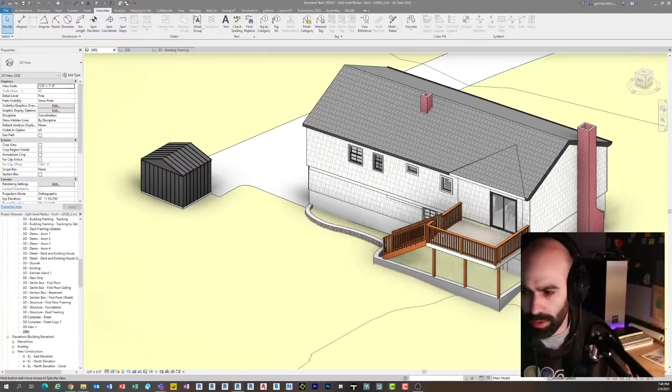If I go to the side, you'll see the grade drops from front to back a little bit down here. So what we're doing is we removed the existing deck, and we're building this. Nothing crazy, right? It's 2 stories. This is actually going to be a dining room.

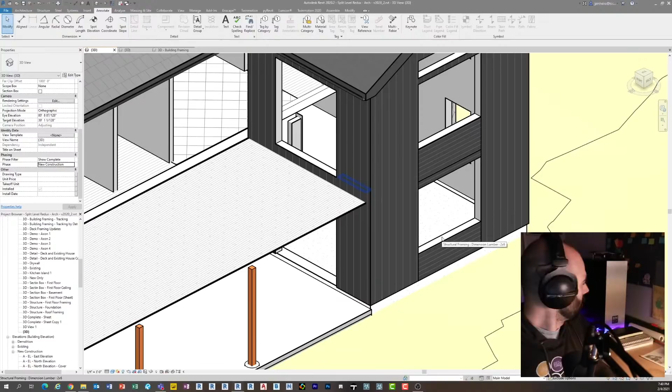Down here is going to be a new office. A couple people mentioned that maybe it looks a little different back there. I'm in the process of getting rid of some of the furniture in here, just because we have a dumpster in the yard.

But then also building this huge deck here, which is going to be great because anyone who's ever lived in a raised ranch knows that the connection between the public space on the upper floor and the yard can be kind of awkward. So being able to walk out through different areas and connect those pieces is going to be really nice, not to mention giving us a nice little covered patio in the backyard here.

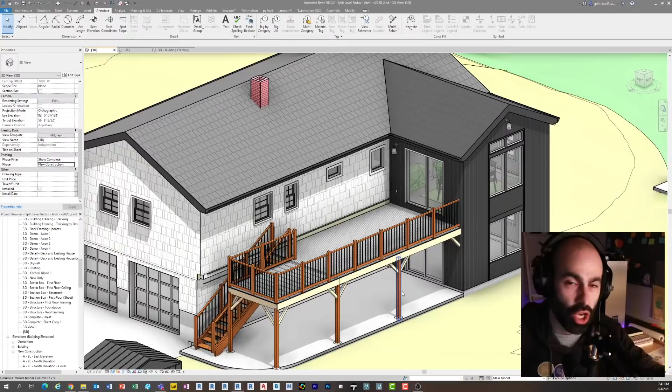And so I want to give you a little update on where we are as far as construction is concerned. Also show maybe some... I know for me personally, and I'm assuming for most of you out there who are architects, engineers, or contractors, just seeing construction progress photos and videos is always extremely exciting.

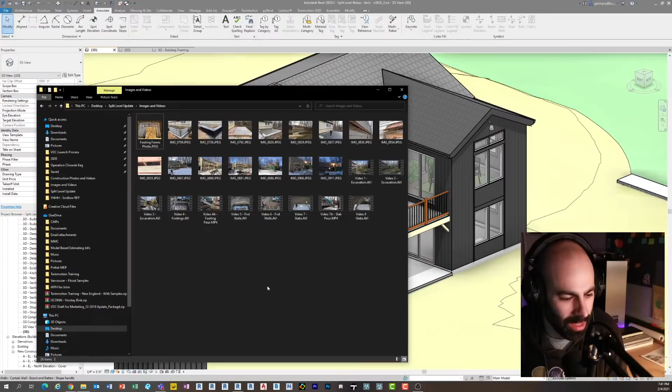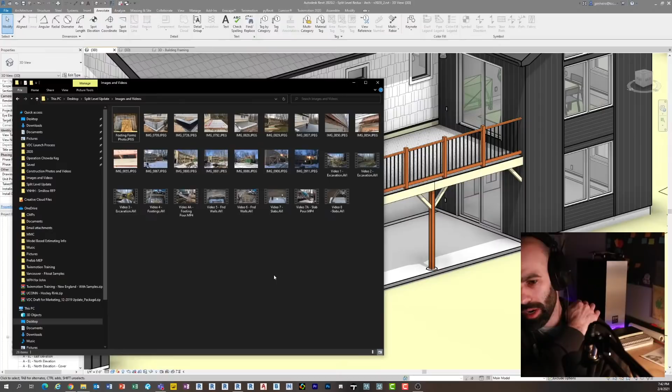Joe Buchek just said, love the cross bracing. Yeah, I was going back and forth about the bracing, because it's not very tall, and you don't necessarily need it since the posts are short, and I also was worried about headroom. But I do like the look, and now that this thing is framed and built out, I think cross bracing is necessary because there's just a lot going on. It's a huge deck. And actually, I do believe there is a sort of code requirement for the cross bracing, depending on how you read it, but I haven't been told to put it there. I'm just going to put it there anyways.

All right, so let's just run through real quickly because I do have some cool content for you. In general, I've been trying to record and document this build for the sake of content like this, but also maybe putting together more structured productions of it, to post on YouTube and share with the world. Unfortunately, due to weather, it's been kind of hard to get some of the footage.

Something interesting on a construction and detailing note: this is a slab on grade, but in Connecticut we have a 3'6" frost depth to the bottom of footing. And because of the way the grade dropped off, we essentially had almost a 5-foot wall, and instead of stepping it, we just kind of made it flat. It's pretty funny when you look at the hole afterwards. Let's see.

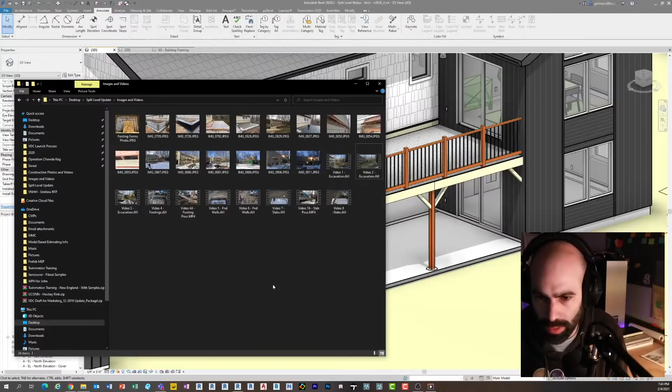I just saw a couple things in there. Yes, structural code, yep, I know structural code. Yes, I know the bracing. And I only went with 4x4 columns, so I get it.

Clay just asked, do you see BIM ever really being widely used in a residential setting? I hope so. There's definitely a challenge to getting it used across the board in residential. There are more and more architects doing it, which is great. Getting residential contractors to do it, that's going to be a bigger lift. But there are benefits to it, and depending on the relationship, you could be borrowing the model from the architect and using that through construction, and at least just extracting information from it. So I think it's plausible. With the right contractor and the right architect relationship, I don't see why not.

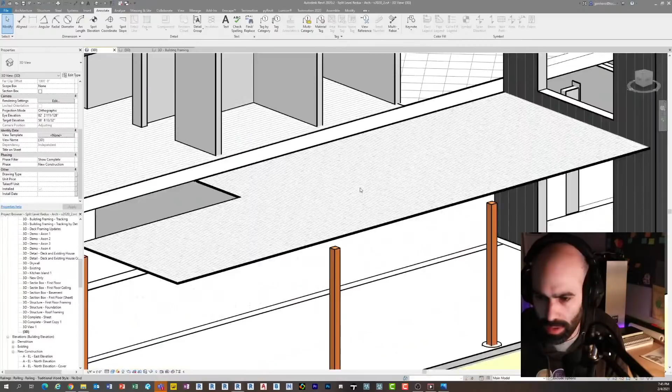Gary just asked, is the railing Trex or your own family? I guess you're talking about in Revit here. So this is my own family, which is basically one of those aluminum railings. I don't remember when I made this family. I made it a long time ago for a house, and I've been using it ever since. I really do like that family. So no, this is my own family here.

All right, so there's the footings. So we went... we use Revit primarily for residential with my business.

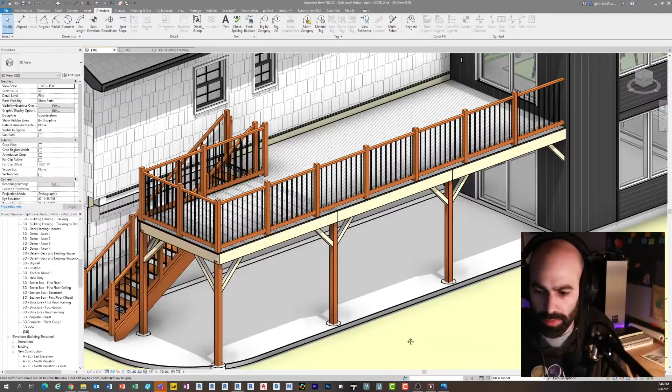Just to run through a little bit more progress, that went pretty good. Excavation went pretty good. I would say the only part that didn't go good with excavation is, and I mentioned this last week, was finding my septic pipe finally, and it happened to be right in the middle of one of these piers. We're going to talk about on a silly little job like this, the snowball effect that caused on this project and the changes that were made because of it, it's pretty impressive when you think about it. It's one of those things where the only way we would have known is by digging and finding it ahead of time. But either way, we had to put a post there.

So let's just quickly go, I'll show you a quick video of the footings being poured because that's fun to see. Enrique was my concrete guy, he was awesome, he's great. There he goes, pouring the footings. The footings, the excavation, footings, walls and all the concrete was basically done in under 2 weeks. And that was with the excavator only working on weekends and Enrique coming in between doing what he was doing. So pretty awesome, happened pretty quick.

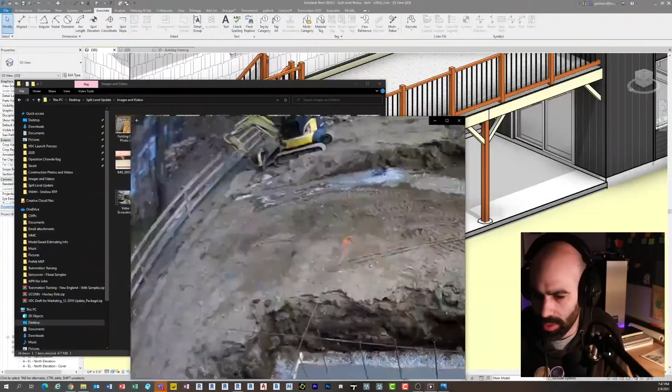Almost too fast because the framer came and the slab wasn't quite ready yet. But that's also because it was 10 degrees outside. So there's a video of the footing being poured, just another video of it there too. Let me mute that because we all love seeing construction videos, right?

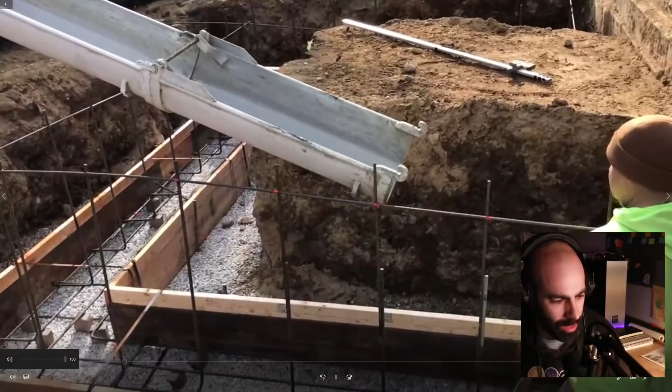So there's the footing going down. You can see how deep that hole was. It's pretty wild when you think about it. At the end of the day... oh, my desktop audio is going, sorry guys. At the end of the day, it's a slab on grade, but this is what we had to do for excavation for it, which is absolutely nuts when you think about it. So there we go, pouring some concrete, pretty fun.

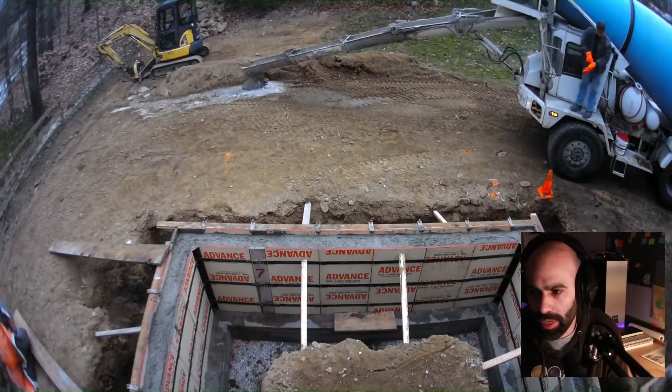And then obviously walls, running through some nice time-lapse walls because that's always fun to see. There's the footing walls came in, rolled in. Pretty awesome that we were able to roll the concrete truck right up to it. Luckily, there was just enough room between the septic tank and the house that he could roll through it. He did do a little bit of work to my asphalt, but otherwise all good there.

I see you guys are talking about residential construction, which is great.

So now the slabs are going in. You can see we got a nice little thermal break going on the edge of the slab, and then building up the vapor barrier and rebar and all the good stuff in between the slab.

While that's going on, I'll quickly read some comments. Jordan says he's full on modeling a house for a new build in St. Paul - nice, great to hear it. Joe Butek just said he uses Revit for residential, and the 3D is amazing. We are purely residential too. Philip said he's heading that way as a residential builder as well. That's what I like to hear. I'm not as surprised anymore to hear architects using it on the residential side, but builders is where I'm interested to see it grow.

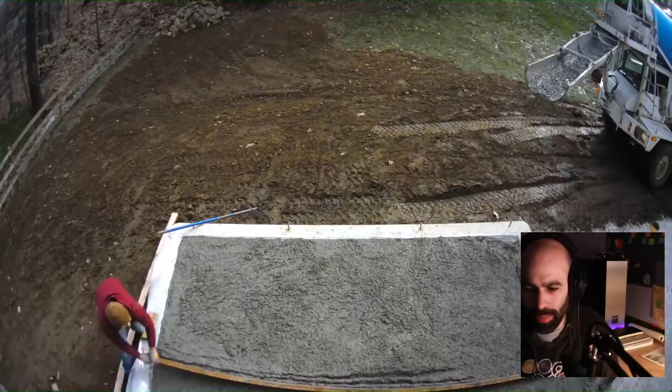So real quick, let's see the slab pour so you guys can see the unfolding of it all. There's the slab pour, there's my buddy Enrique doing an awesome job troweling and all that good stuff. Nice and smooth, awesome. And there's the slab. Unfortunately - fortunately we had great weather for these two weeks, but the day he poured the slab it dropped to like 20 degrees that night, and it's basically been crap weather since. Not too hot, not too great, but it is what it is.

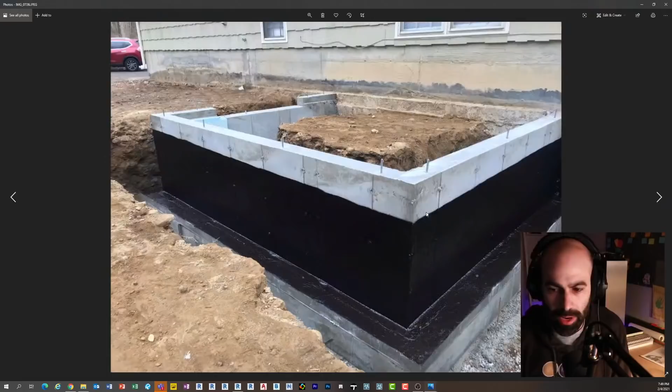Just a few more photos. Here's the foundation wall, here's the foundation wall with some waterproofing. There's the slab rebar, there's the slab after it was poured, nice and wet. That's what the view looked like.

Joseph says yes, that is a beautiful footing. For such a small little addition, concrete went so great, and Enrique was the man. Joe, I know you're in the area, so if you're ever looking for a concrete guy, reach out to me and I'll give you his contact information. Insane, awesome job - no radiant heat on that, by the way.

And then stuff like this happened. So this is where I'm going to pull back to the Revit model, and then we're going to jump back and forth between it. A couple things before I jump into where we're at now - as I mentioned, that part went really smooth, went through pretty quickly. The contractors were great, the process was great, and the weather was great. So not too many changes.

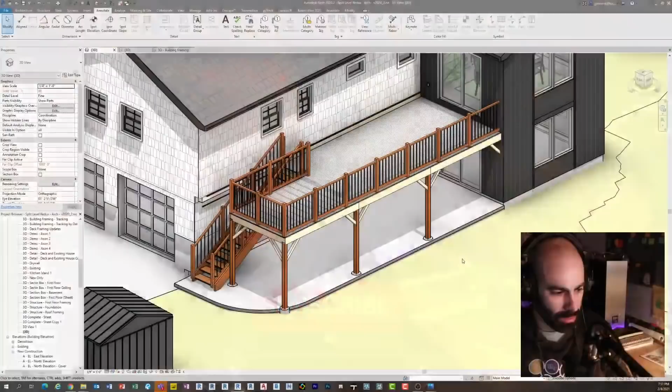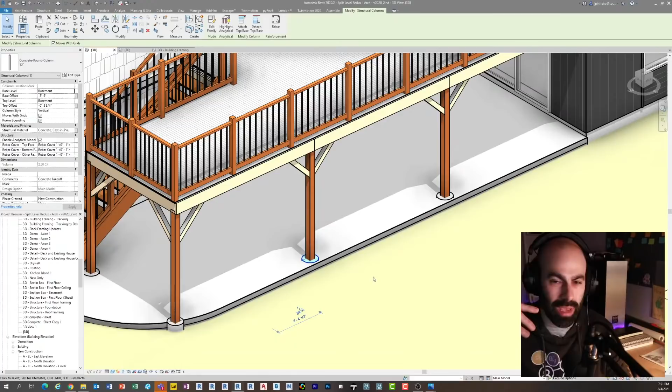The big change was the footing - oops, I hit subscribe. The footing right here had to move, and it had to go this way by like a foot or so less, which means the whole deck was going to move, subtract by like 2 feet, let's say, and that pulls the entire deck back 2 feet or so. I didn't want to make the deck smaller, I liked the size the way it was, so we ended up making it bigger.

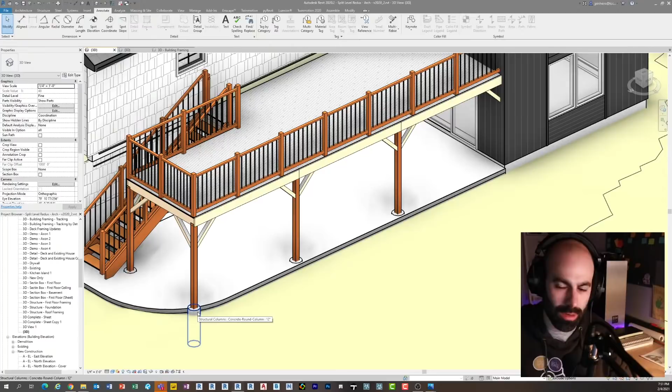As you can see here, this is actually the new layout of the footings. Because the deck had to expand, the footings had to expand, and in order to make the spacing equal in between, the space between the beams got longer. So we got to that point, and I updated the drawings, which was fine, and we used it for the framing.

So then the framers come out, and day one of framing - this is basically what they got done, which wasn't bad. As you can see, this was after it snowed, so day one of framing it basically snowed. You can see if I zoom in here, they got the first floor done. Sorry for the dark pictures, but I went out at night.

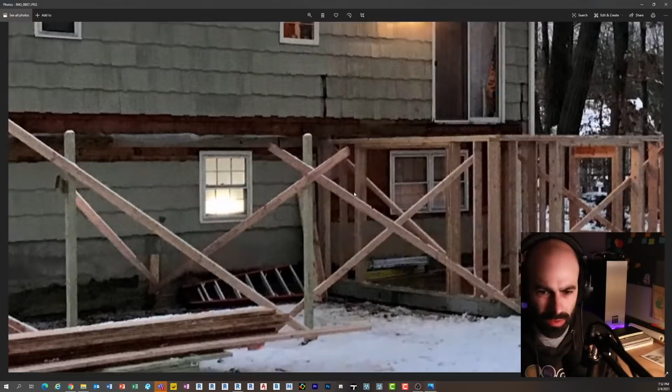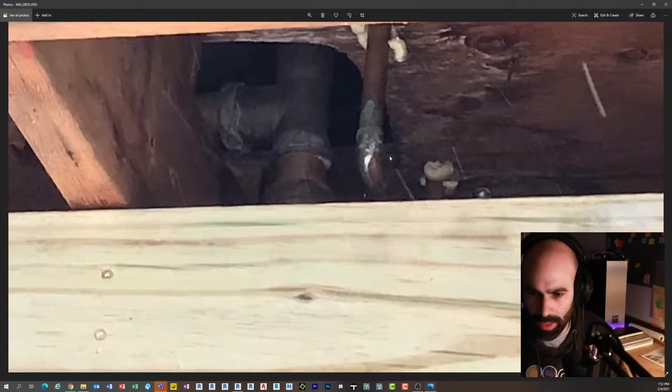But this is where the damage happened - notice how all of this is ripped up over here. That was not supposed to happen. Things happen, right? It's the way it is. But this is what really bothered me - if you zoom in, I walked up and it was snowing outside, and sure enough that's the drain pipe to, I think, my bathtub, and that's the supply line to a sink.

Remember, this was 17 degrees that day, and needless to say, you can see here all the insulation's gone, and you could just basically see through my joists, right? So needless to say, wasn't happy.

It happens, depending on unclear instructions or whatever. I could tell you the demo drawings didn't have anything about removing this, but this sort of leads to one of the first ways I used Revit to solve a quick problem in the field, the ability of 3D views in Revit and being able to explain and show things.

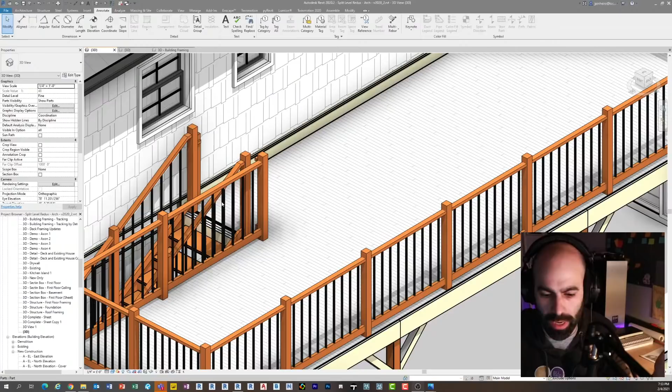I've already mentioned this many times in different lectures or sessions here, how I believe we should use 3D as much as possible, add 3D axons and all kinds of stuff in our drawings. And these drawings have 3D axons and whatnot.

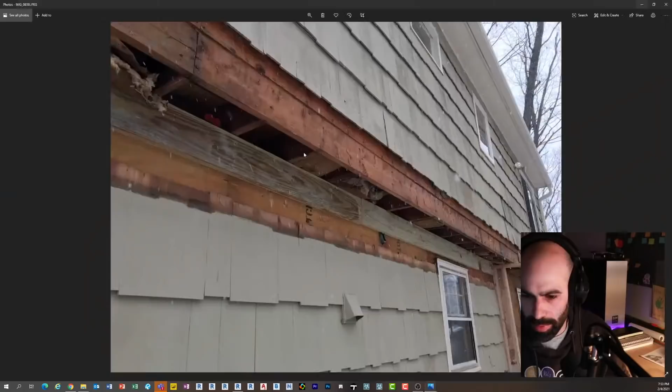But what we had to do now was I had that detail that just happened, which we weren't expecting, so we quickly needed to show the framers how to fix that. I sketched it by hand a little bit to figure it out in my mind, but then I wanted to update and keep it in the model. I wanted to build this stuff in the model and then use it.

So the drawings are out there, the plans that were used for permit. But I found myself creating a bunch of printout 3D images that really, the guys ended up building off of a lot of these details, especially the ones that are on the fly.

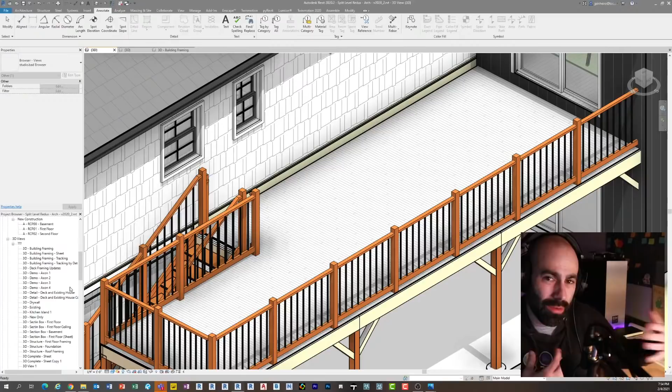Obviously I'm sitting right here next to the project, but to be able to, within 15-20 minutes, produce some of these images and drawings is extremely valuable, right?

You can see I printed, and actually there's another detail there. So I quickly modeled this, printed it out on a piece of paper - I think I had a section view of it too - and then we just walked through it. Real quickly I was able to mock up this detail, show the framers on the fly, and they were able to fix it, modify it.

And now we've got ourselves at least a watertight sort of detail. So here's the detail actually built now. Let me see what the picture is. Can you see in this photo? I guess I don't have a photo on it, but if I zoom in a little bit you'll see it.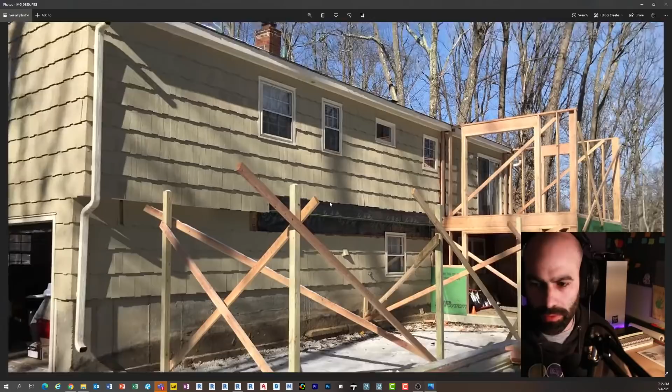Because with a residential project, you don't need to reissue an addenda and an RFI and a bulletin and all that - it's just not how these things work, they don't work that fast. So being able to really quickly flip out an image is more like an ASI, an architect's supplemental instruction. But in this environment, it's more just: how are we going to fix it? Let's fix it, throw it out there, and go for it.

I just see a bunch of chat, so let me quickly answer - classic siding and classic New England, yes that is the shingle siding, classic New England. The split level with the 2-foot overhang thing - by the way, I never imagined myself living in a raised ranch, and I'm not a huge fan of that overhang detail at all, honestly. But it is what it is, and we're dealing with it. It is very classic New England - there's 30 houses on my street alone that have that setup.

Ronald just said, I always strip down my versions of models to remove any extraneous information. He's replying to Eric, who asked, any tips for digital ownership of Revit models and sharing?

It's more of a commercial question, but with residential, I do believe there's the opportunity for this. If you find a contractor who is familiar with Revit, maybe there is one, maybe it's myself, maybe I decide I want to do just GCing and architecture of residential.

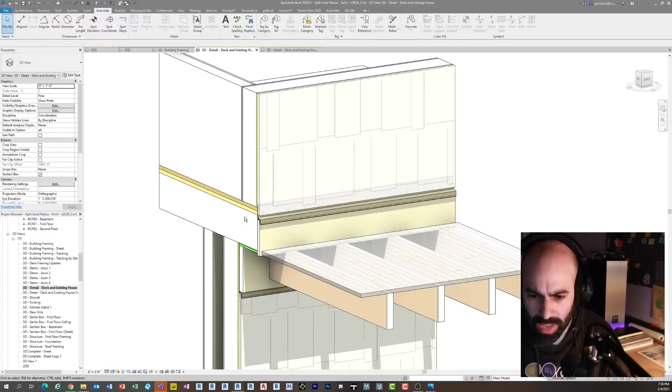Pretty cool, right? So that was just a quick example. But even before this, I should rewind a little - there are a few things I used Revit for that helped me a lot, because remember, I'm GCing this. I say GC just because there's only aspects of it that are, and there's a lot of overlap with architecture and residential when it comes to that. But material ordering, tracking progress, all of these things, beyond just making changes on the fly, are also huge.

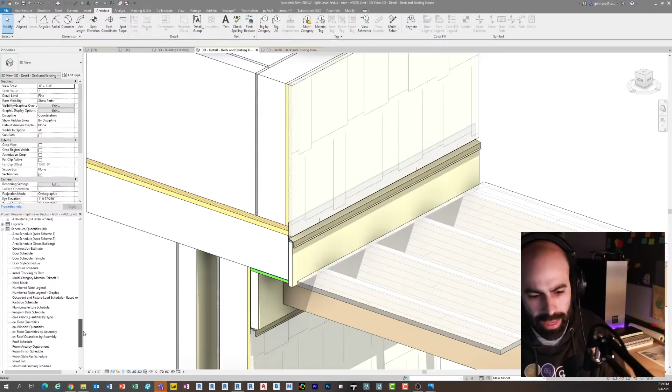I had to order all the material myself, so schedules - if you'll notice here, I've got a whole bunch of schedules. If I go under multi-category material, here is a multi-category material, I'll zoom in so you guys can read it. This is literally every material in the project. I have the material name, the family and type, and then the area, volume, whatever it is.

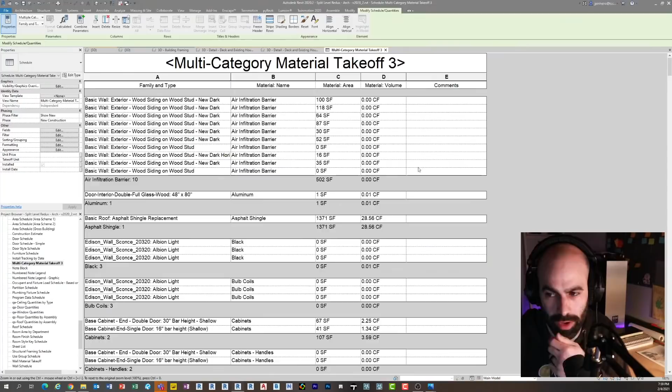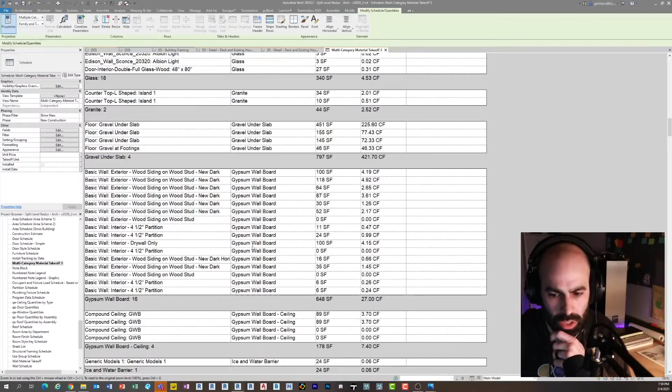So as I go through this, I can filter by the family type and look at all the materials within it. So you could see here, this is all the gypsum wall board, but these are all the wall types they belong to, and there's square footages. So for me to quickly rip out square footages and areas and linear feet of boards and beams, huge - being able to just quickly use that information to order materials.

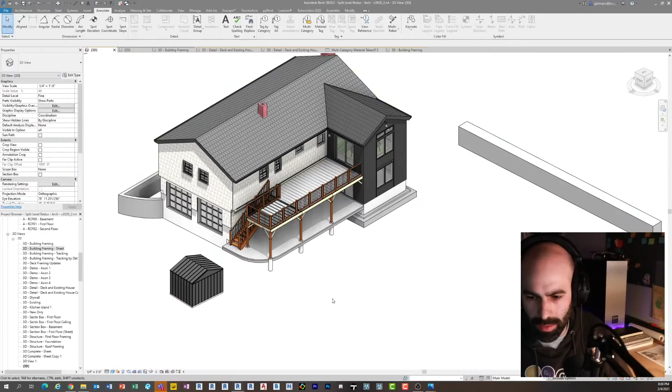But then silly things, like if I go to another 3D view here - ordering gravel, right? There's obviously formulas and all that good stuff. Let me go back to this view where you can figure out the volume of gravel and whatnot. I'm sitting here like, well, I have a model, I could do all the math, but why not just model the gravel? So if you zoom in closely here...

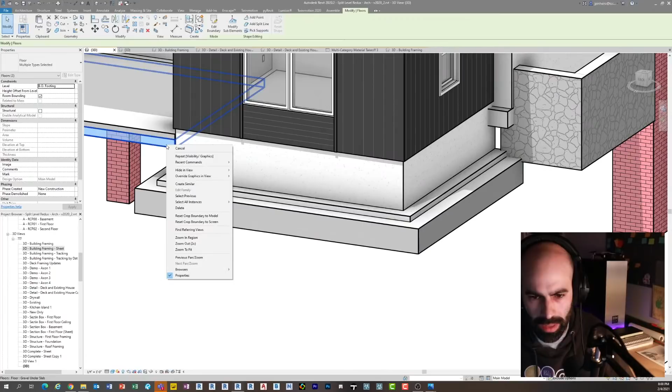This right here, this is 6 inches of gravel under the slab. This is gravel representing my drainage around my footings. So if I highlight all of these, you can see there's gravel here, and gravel underneath there. Let me just isolate it. So I modeled my gravel, and then I used that for the quantity, the volume I should say, and then I ordered the gravel.

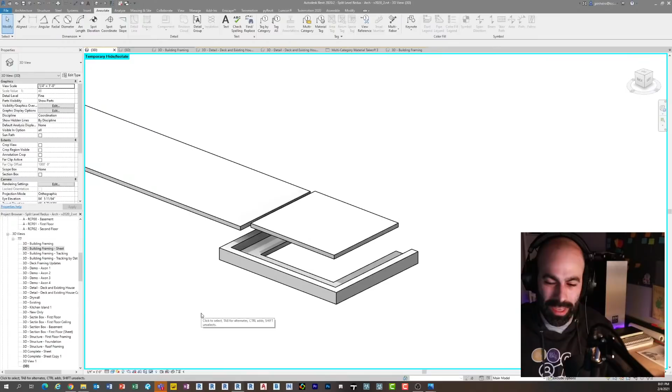Let me tell you, there is a pile only about 6 inches tall left, so that's pretty cool. The excavator was extremely impressed with how close it was, and the fact is I didn't have to guess or just take areas and do the volume stuff. I just used the real information, and as long as he wasn't too wasteful with it, I almost had the exact amount of gravel, which is something you're usually pretty conservative with, and you end up with a ton of it.

Ordering wood is one of those things where... the lumber yard. So let me go to my framing real quick - deck framing.

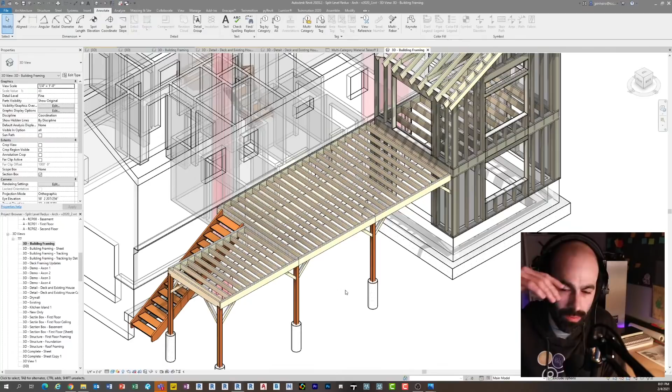So as you saw from previous episodes, I modeled most of my framing in this. Actually, I modeled all my framing, I should say. And I use that information for quantity takeoff, for pieces, for figuring out linear feet and all that good stuff, even number of hangers and all that.

The one thing I discovered is I did all of this, and then I sent it to the lumberyard, and they do a takeoff and give you a quote based on the drawings. Across the board, I was getting 18 to 20% more on their quote than what I was getting. I know there's a factor for cut, but it was so consistent that it was surprising me. Turns out that's literally what was being built in, the 18 to 20% for cut and waste.

So the one thing is, if I had a little more control over the framers on a job like this, or maybe I was the framer myself, I would take this information and produce some sort of a diagram. I have a view like this in the sheet and all that stuff, but to be able to show the framers this piece is meant for this, unfortunately you just can't do that. So the 20% just has to be there, because these guys just rip and roll, man. They just rip it, right?

But the reality is, if I was to use my model as the guide, as the quote, and then maybe out in the field you mark them and say A, B, C, D or something like that, you could tell them, hey, there's actually 12, 2 by 10 by 10s. Don't use the 2 by 10 by 12s for this little short piece. That's where the inefficiencies come into play, right? But pretty cool that I was seeing at least an 18% to 20% almost across the board, which is pretty wild, right?

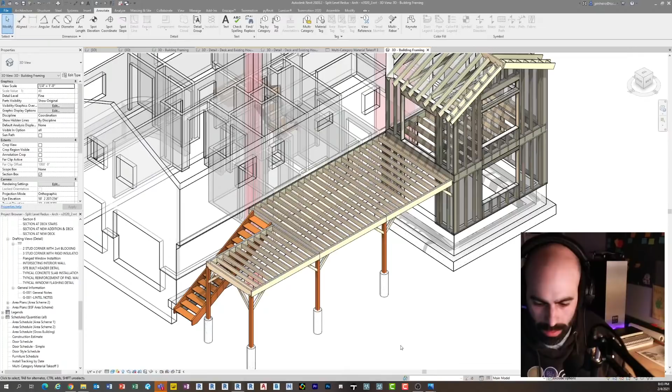Okay, so then before I jump into the deck itself and some more of the changes, I will run through a few more things that I'm doing with schedule and the model itself.

So if I go in here and I go to tracking, here's another really cool thing I'm doing. Sorry, I'm just reading you guys' chats. Remember, feel free to ask questions and stuff.

Pressure treated lumber tends to twist a little bit. Yeah, Joe, it does. And that's why there's blocking and all kinds of crap all over this now, because I'm also worried a little bit about twisting too.

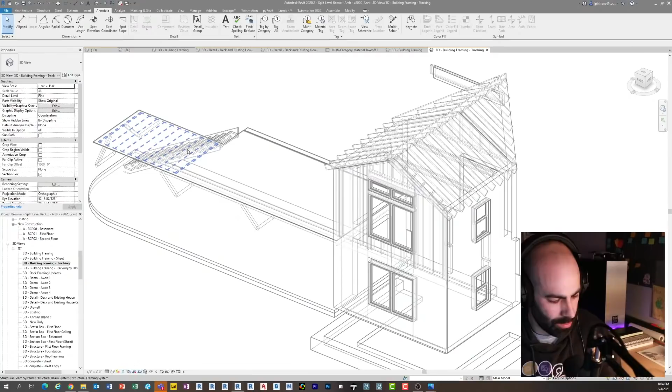So check this out. What you're seeing here is a 3D view of the framing and some other details like windows and stairs and stuff like that. Everything in pink has been installed. So if I turn off this filter here, you'll see what's not installed. Let me try that again. There we go. So this shows what's been installed in the field.

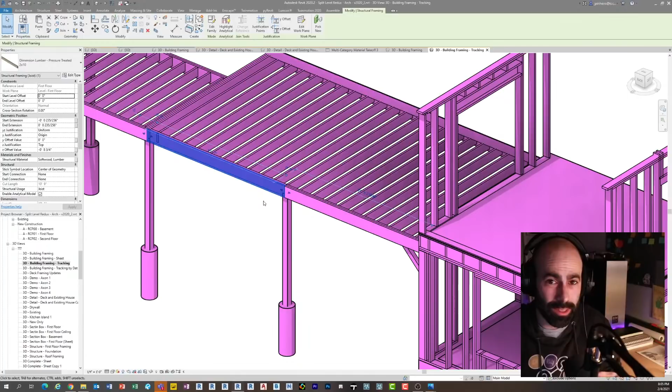I'm taking a process that we developed at Turner, my group developed, using Assemble, which if you guys check out 2 episodes ago, head on over to live.bimafterdark.com to check it out. I talk about Assemble a little bit, and we're using that to track progress in the field, because it makes it really easy to input data and then also to condition and modify it.

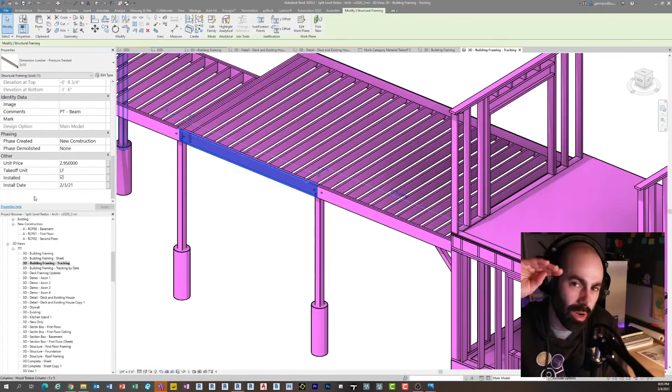But if you'll notice, I have some extra parameters, and hopefully you guys can read this. I can't, can I scroll in there? Look at that, nice. Let me roll down here. So I have a few global parameters in here: unit price, takeoff unit, installed, and install date. Those are multi-category parameters that I hit every category it let me hit. And I'm using those to track different things.

Unit price I haven't kept up to date since my estimate. I use that for budgetary reasons, and I didn't actually roll back to input the new data. I will tell you that a 2 by 10 is no longer $2.95 a foot, it's like $3.20 a foot or something like that right now in my area. So pressure treat is very expensive.

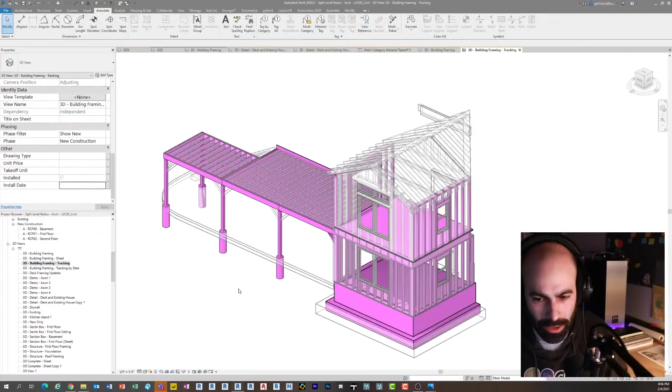So what I'm doing is I'm actually tracking if something's installed and tracking the install date, which is pretty sweet. I have progress here, and I can look back on the actual progress. I also really wanted to see if I can get this process that we developed at Turner to work using just Revit, because as a single architect or a GC, you may not want to spend the money on something like Assemble or another program. You're already spending the money in Revit, so you can do it, which is pretty awesome.

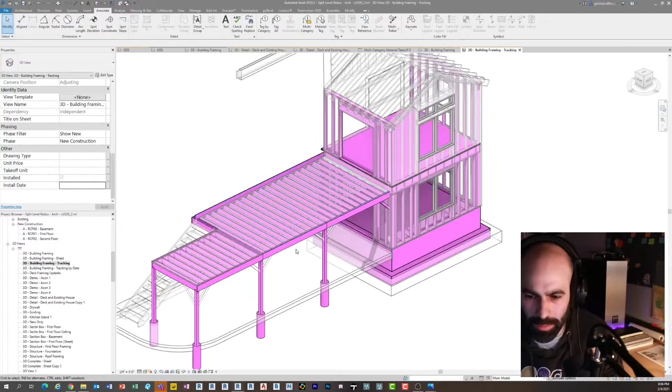The downfall is, if you'll notice, these things were all installed on different dates. If I click this, this foundation wall was installed on January 14th. This beam here was installed on February 3rd. So I just have them colored purple. If I want to see what days everything was installed on, I can, which is pretty cool. That's this little Easter egg looking thing.

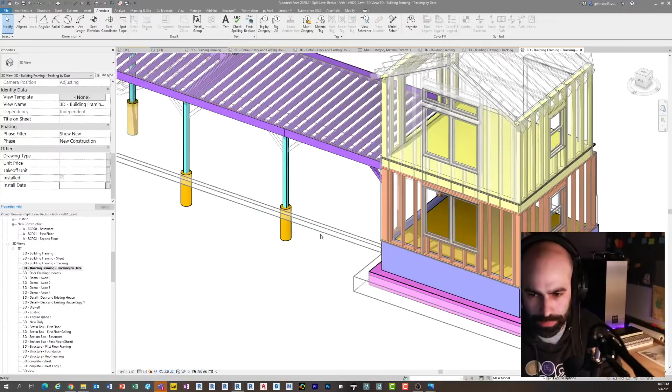I'm going to turn off the not-installed-yet filter. What you'll notice is that, and this is just a limitation of Revit's filtering, I basically need a filter for every day. It's not that bad because I'm adding the filters as I add the information in, but as you can imagine, it's a pain in the butt. Whereas if you saw when I was using Assemble, it automatically just grabs the parameter called install date and puts a color to every single day, which is pretty cool.

But being able to look at it like this, and seeing sort of the progress in the process, is cool, and it could be extremely valuable to people. Right now I'm just kind of using it as a test, but it would be good to look back afterwards and see when things were installed, how the progress was on a more complicated project, maybe the sequence that the contractors took, and so on. So pretty cool, and it's very simple.

It's literally, I can show you how I do it. Ready? You go to Manage, Project Parameters, add a new project parameter. You say check all right here, so you check everything that exists, and then I'm going to call this one install status live. I'm just making a new one called live. I make these all instance parameters. This one I'm going to make a yes-no parameter. I'm going to group it under other, which is fine, and then click OK, and then click OK.

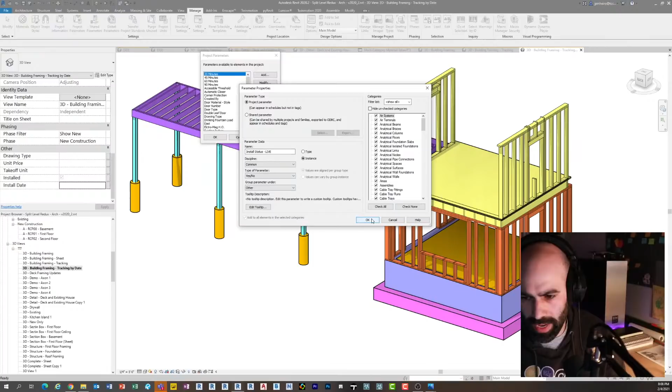Now when I click an element, you see this right here, install status live. There it is. All I have to do is check the box, and that tells Revit it's installed or not. With the date, it's literally the same thing, with the unit pricing too. That's how easy it is to add parameters, and then you can use that information to drill in. You can make schedules out of it, you can make views and filter them like I'm showing you right here. So the power is there, and all you're doing is adding the ability to add more information to your specific model elements, which is pretty sweet.

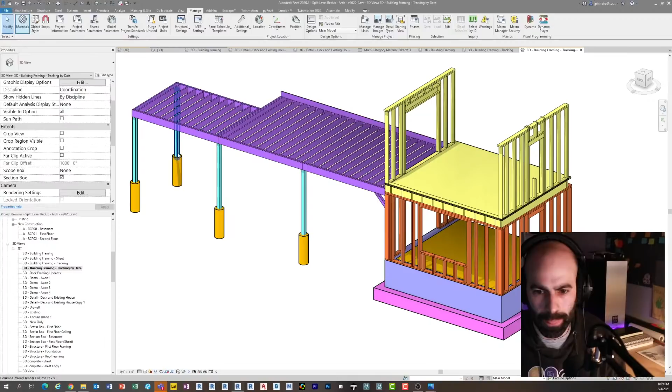I'm going to undo that because I just realized I'm actually in my real model. I should have probably saved this as a live model, but that's okay.

Yes, I have. That is what we use at Turner for all of our document management. Doing my own 2 or 3 month projects as a GC and architect, I'm not going to invest in Procore, plus I just don't have that type of documentation happening on this job. But Procore is fantastic for what it's built for.

And Matthew Barnett just said, I'm late to join the stream, what have you used to model the framing? Matt, this is all built 100% in Revit. I'm using beam systems and different variations. If you check out live.bimafterdark.com, I have a few episodes where I actually run through this specific project and some of the ways that I built the framing. Or head on over to the YouTube channel itself, and I may have a separate individual tutorial for it.

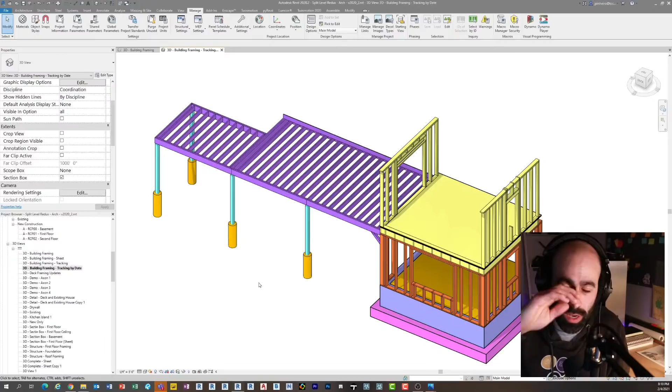But all built 100% in Revit.

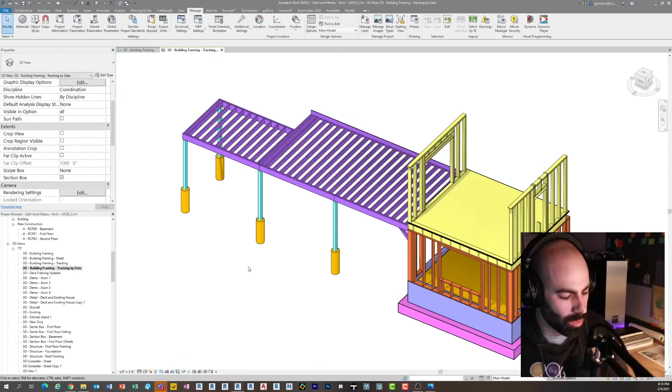But Revit actually gives you the ability in filters. For those who haven't used filters, I do plan on digging in even more. I have an episode with Aaron Maller from last year about filters. With filters, you can see I had one for not installed and installed. But you could, in theory, create a new filter called 'not installed live' and just hit a couple of the categories because I don't feel like hitting them all.

Now you could go to install date and say 'has no value.' I don't remember when that was added to Revit—maybe 19, maybe 20, maybe 18. No, it wasn't 18, but maybe 19. This is 20, I believe, I'm in right now.

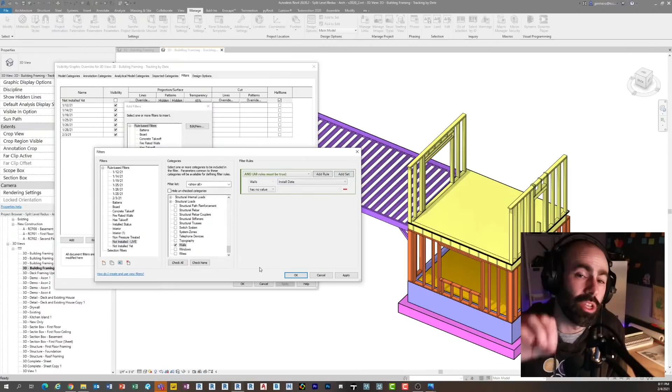So yes, good point, Emil. If you don't want to have the checkbox, you could easily just have a filter that says the install date has no value, and then you could turn it off, halftone it, do all kinds of cool stuff. These are the options you have in filtering: equals, does not equal, greater than, less than, contains, begins with, ends with, and then has no value or has a value now, which is pretty awesome.

Maybe someone out there remembers when those were added, but I don't think those were there forever. I know those weren't there forever.

Cheers, Matthew. Appreciate it. All right, man.

Awesome, so cool. So there's something I'm doing there which is pretty neat—being able to sort of track the progress is awesome, being able to check it against it. At the end of the day, I'll have these install dates and be able to look on a calendar and see how the progress went, which is pretty sweet.

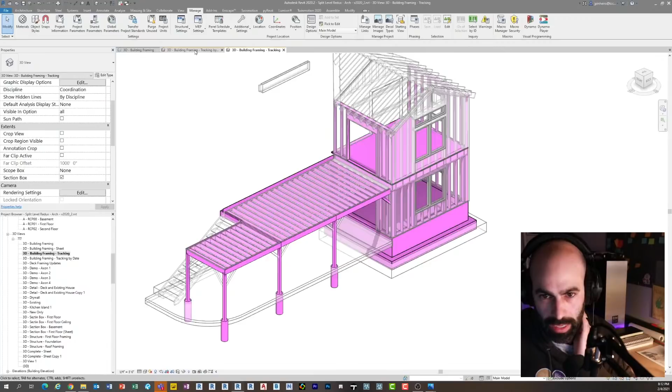So then let's roll back to the deck. A few things were happening on the deck, and again, just another great example of where having the ability to quickly modify, create, and spit out imagery and documents—instructions essentially to the contractors—is so valuable.

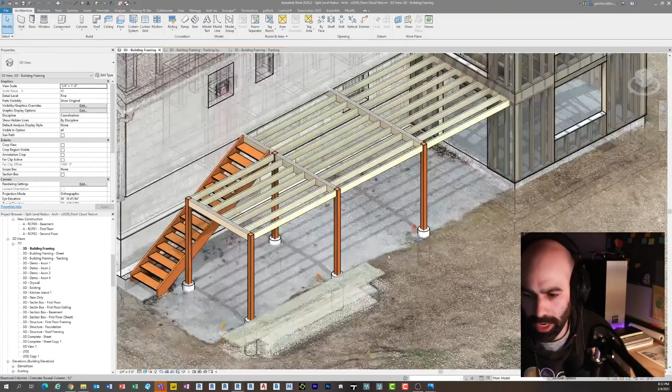Actually, the reason I opened this one is this is from the drone scanning episode last week—this is the old deck design. As I mentioned last week, if you look closely there's these little cones showing the length, the change of those piers. You'll notice the end pier actually moved almost 2 feet over, this one moved about 1 foot, and this moved about 6 inches, to evenly space them, because of that distance and a couple other things that happened.

So the distance of these joists got longer. I wanted to go in the direction you're seeing here, which is 2x8s, keeping it really flat because I didn't know what kind of headroom I needed, and sort of creating these smaller spans with the beams running across this way. Because we expanded the decking, the length of those joists got longer.

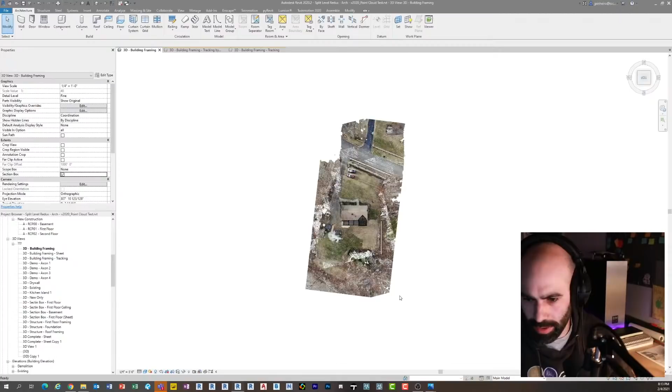The other thing that happened is until we established the slab—let me turn on a section box. I know a lot of you guys don't come here to talk about geeky Revit detail stuff or architecture detail stuff, but I'm hoping you're interested because I love this kind of crap.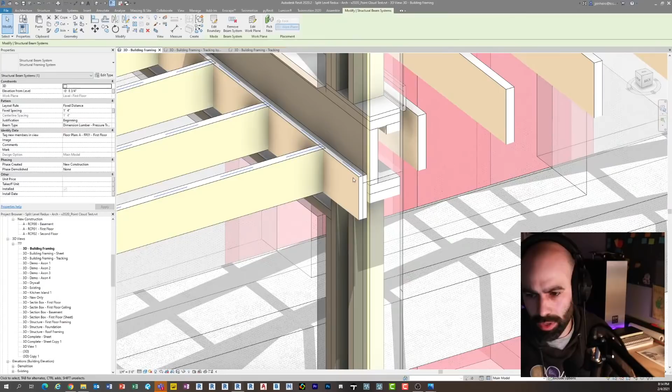So if I cut a section through here really quickly—just cutting a section through it—you can see the value, by the way, in modeling framing. Even if there's going to be a structural engineer down the road on a project, just for your sake of figuring things out as an architect, modeling it is incredible. As you can see here, the way I modeled this was already kind of tight to the window head, right?

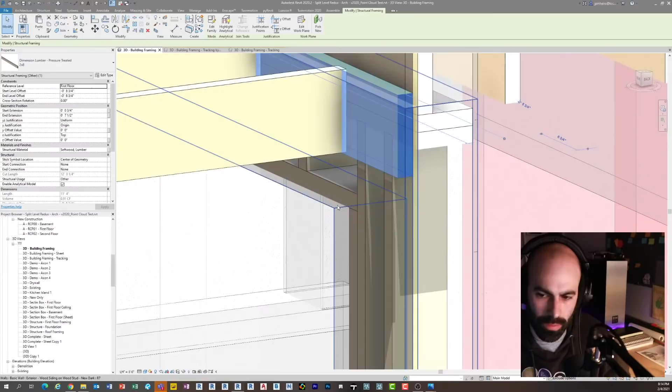That was with me not 100% knowing these heights until we dug down and found where the slab was in relationship to everything. So long story short, this ledger board ended up being just about a quarter inch above the rough opening of the door if we were to build it that way.

So all of that being said, we ended up changing the joist directions. That was the old design. Now we go here, which is the new design, right? Let me pull up the deck framing.

So we changed the joist direction, so now this is no longer a ledger board, this is just a nailer. These joists are spanning longer, but we're doing 2x10s here, and then 2x8s there, at 12 inches on center, and all is dandy.

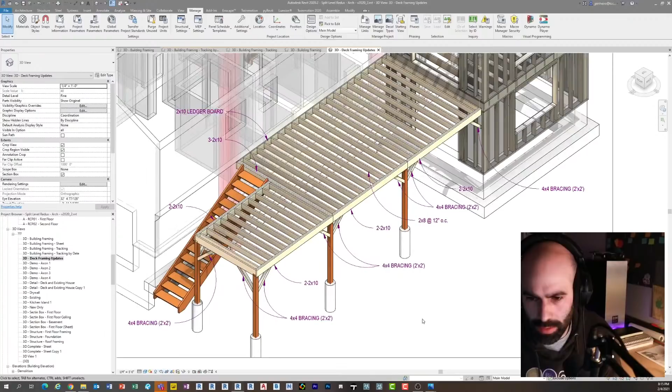But this was a massive change from the drawings, right? And so I thought about, well, I can just update the framing plan, print that out, blah blah blah. But at the same time, just to get things moving, I produced this image here and printed it out on 11x17. There it is, we used it.

We marked it up a little bit, and that was the instructions based on the changes, and that's what they built off of, right? Because the footings were there. The footings were there, so there's no measuring and setting that up. They're just going off the footings, so they don't even need the dimensions anymore. They just need instructions on how we're going to frame and build this thing.

Pretty cool, a pretty cool example of how being able to use the framing, using the details, then create these images and pop them out, helps.

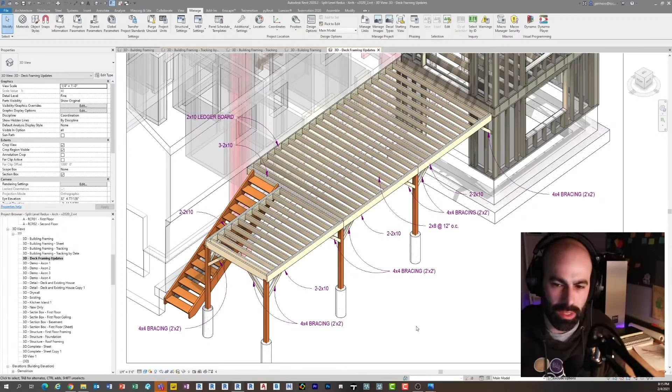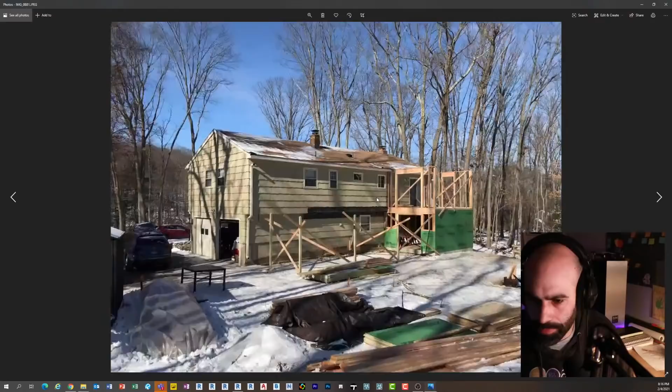And so here's a little bit - of course that's a dark photo. I took photos tonight and forgot to upload them. That's okay. So now you can sort of see if I zoom in a little, there's the 2x10s across here, there's the 2x8s across there, and all the lovely bracing for now to keep everything level and flush, but super helpful, right?

In general, when you think about it, my goal is not necessarily telling them how to do their job. My goal is to get it built correctly, get it built with my design intent, and make sure that they understand the design intent. So whatever it takes - it doesn't always have to be a hand-drawn or a 2D plan. A 3D model or diagram is an extremely valuable tool for those types of things.

So let me see who else. Matthew just said, cheers, how's it going? Core Trapper, hello. So pretty cool, right?

Just various ways that as this thing is developing, we're using these models and this information to build. Another example that's really, really recent is this wall here.

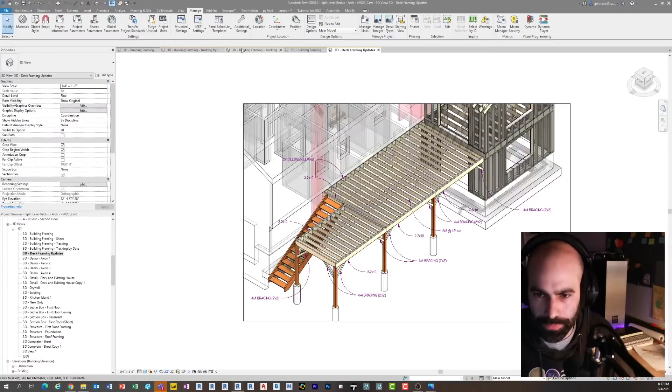If you saw from the photos - here it is, nope, this front wall here, which is - there we go, this big gable wall. You can see it's got two windows in it and so on. We're trying to figure out what the easiest way to build it would be.

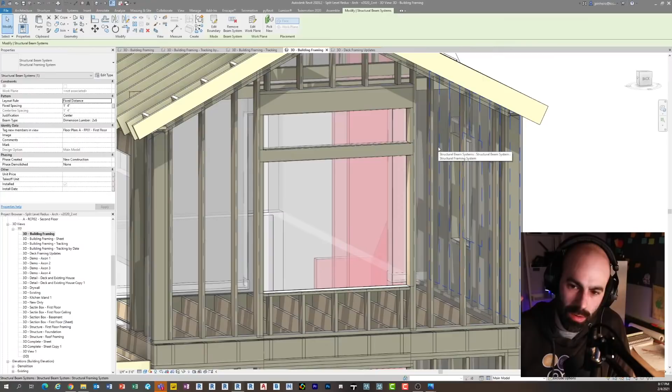And so real simply, I actually don't have the image here because I didn't save it out. I just quickly copied and rotated this thing down, laying it down on the ground to see if it would fit and if we could kick it up and all that good stuff. So pretty awesome, pretty cool that you have the ability to do this on the fly, give instructions, and use this information - extremely beneficial.

Another thing, just by the way, for sort of material takeoff and whatnot, that I did is if we go to these schedules again - some interesting things. So here's my structural framing schedule. Let me zoom in.

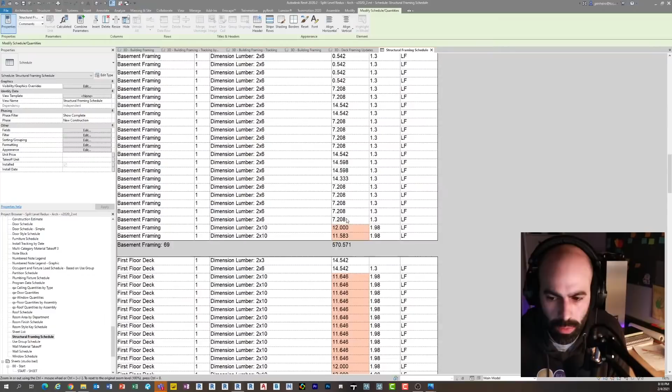And so what you'll notice is it's pretty straightforward. It's basement framing, 2x6s, right? And then there's length - anyone who's ordered wood knows that you usually order by linear foot. But then you also, when you're ordering the wood, need to let them know how many of each length you need. So 2x10 by 10, 2x10 by 8, 2x10 by 12, 2x10 by whatever, right?

And so what you're seeing here is I'm using conditional formatting to figure out what sizes I need in a specific area. So if you look at this, it's showing anything that's 12 feet or less, or between 10 and 12 feet, highlighted in orange.

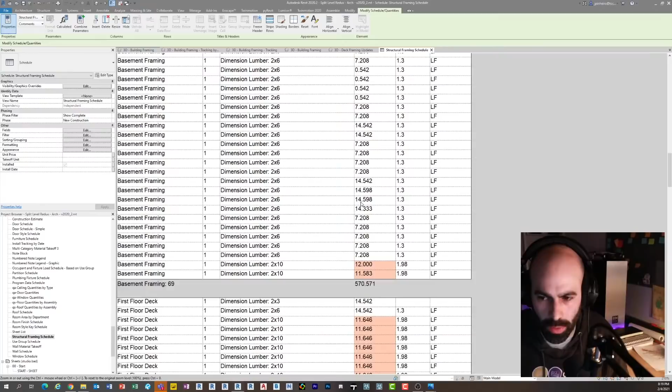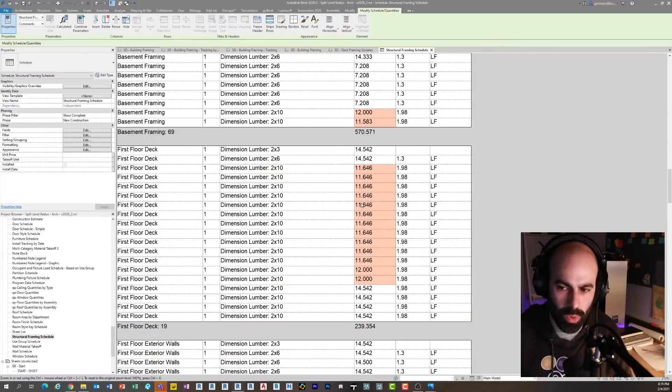In my schedules, I'm using conditional formatting to highlight, and I only did it for a specific order because I need it for that one, but I easily could have set up multiple conditions that told me different things, like all the yellows are 2x10 by 12, all the blues are 2x10 by 16. You can quickly condition and highlight your model to get that out of it. Again, there's the 18 to 20% that all the framers put on there, and maybe you can't be this specific when it comes to wood framing because there's just so much waste right now. I don't know what the answer is there.

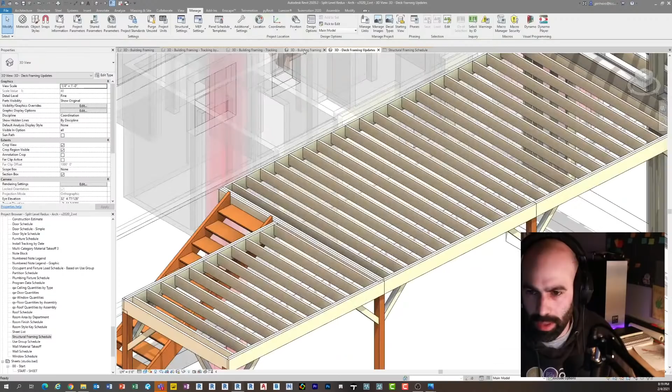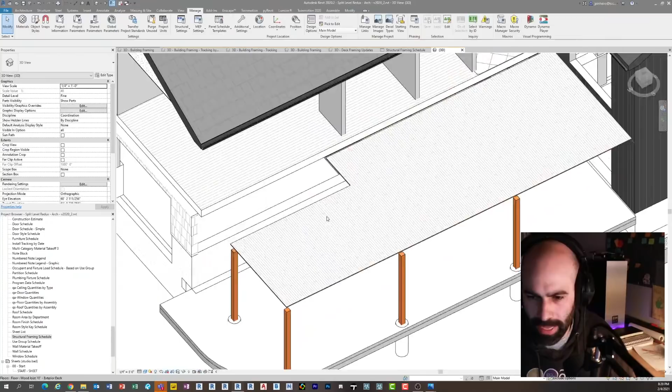Andy just joined — awesome, thanks for joining me, Andy. Emil already asked, awesome, well cool. So unless you guys have any more questions, that's kind of what I wanted to go through today. There's other things I can dive into, and if this was interesting to you guys, please feel free to comment and email me and let me know.

Ernesto just asked a question: for some of these changes, are you adding a phase and demolishing, or are you just archiving then adjusting the model? I'm just archiving and adjusting the model because of the speed at which it's happening. I wouldn't necessarily suggest creating a phase for every change — that could be pretty ugly. I guess you could do a construction phase and then a new construction phase so they're all in the same phase, so that's plausible. The problem is, if it never happened, is it really demoed in new construction? But I see what you're saying. So I'm actually just archiving the model and keeping it up to date for now.

I guess there's a couple approaches you could take — the phasing, like you mentioned, which is an interesting approach, or you could do a design option with a basis of design, then change for this, change for that. That's a great comment, and probably something that, if this wasn't just my own project where I'm trying things out and using this data, it would be worth the effort to do. So great point, Ernesto.